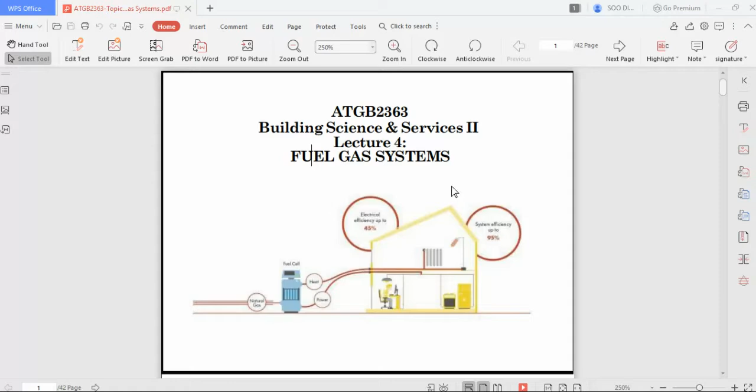Okay, so this is topic 4 for fuel gas system. It will be part 1. Part 1 will only cover the gas industry and the fuel gases. Okay, you have a reference. This subject is based on these two book references, which are Building Service Handbook by Hall, F. and Greeno, and then Environmental Science in Building by McMullan. So these are quite recent books, 2015 and 2018.

Okay, so our CLO: by the end of this course, we should be able to apply all these building services, the principles of design, and also any basic calculation. Okay, in this topic, we are covering fuel gases. So in Malaysia, we have 3 times more gas reserve than oil, and gas is actually more efficient in generating electricity than oil. So this is all information available.

We are actually the 15th largest gas reserve and 27th largest crude oil reserve in the world. So basically, these are all good for the economy lah. We have very good natural resources as compared to other countries. So additional information of our gas reserve and then how much is available.

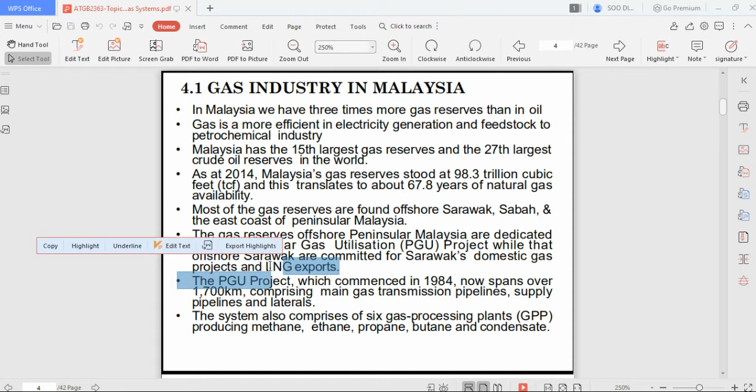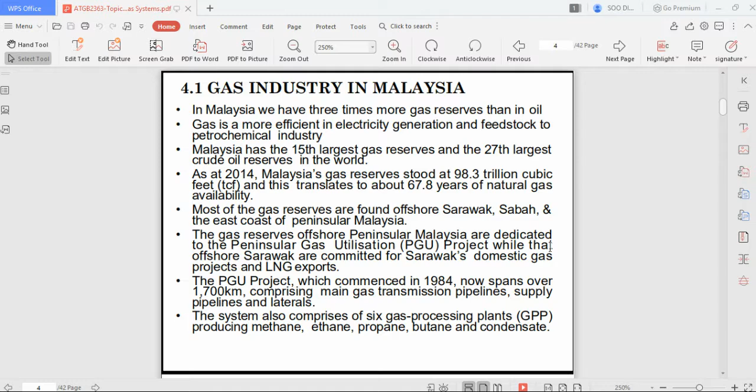Then the PGU project commenced in 1984, spanned over 1,700 kilometers, and we have our main gas transmission pipeline, supply pipeline, and laterals. The system is composed of 6 gas processing plants, producing methane, ethane, propane, butane, and condensate. So this is our Malaysia. We have a lot of pipelines for all our natural gases.

And then there are rules and regulations for our gas supply system: Gas Supply Act 1993 and Gas Supply Regulation 1997. This is to ensure that the supply and distribution of the pipeline to consumers are controlled and regulated. So for any sort of plant, there will be acts and regulations associated with, let's say, this gas supply system or electricity generating system. All these are in place to ensure that everything is built according to spec and controlled, so that from supplier to consumer, all of these are built safely.

So you do not want to have your electric generation building or your gas supply system in a very low quality built environment. If they are built very poorly, maybe in some cases it's not so dangerous, but it must not be allowed lah for the contractor to build poorly or for the designer to design the system poorly. In the case of a nuclear reactor, it's even more stringent lah. That's why there are all these rules and regulations for them to follow.

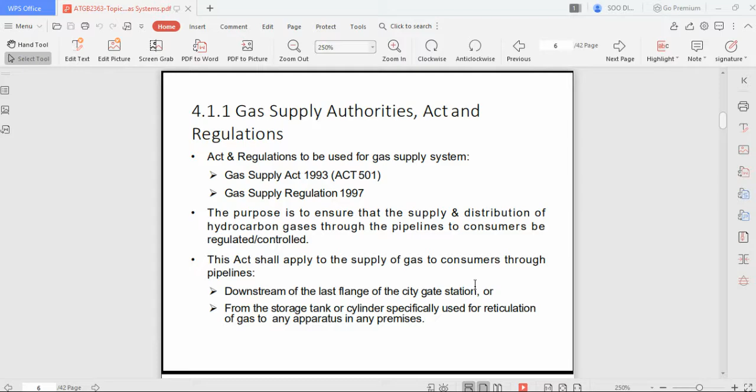Okay, for the gas supply system, the Act shall apply to the supply of gas to consumers through pipeline, downstream of the last flange of the city gate station, or from storage tanks and cylinders specifically used for reticulation of gas to any apparatus in any premises. So the Act applies from where the gas is located, very far away, to the consumer.

Okay, so next is fuel gas. Fuel gases are flammable gases customarily used for burning with air to produce heat, either for power or light. The widely used ones are natural gas and liquefied petroleum gas. NG stands for natural gas and LPG stands for liquefied petroleum gas. So although NG and LPG perform similar tasks, they have different chemical properties.

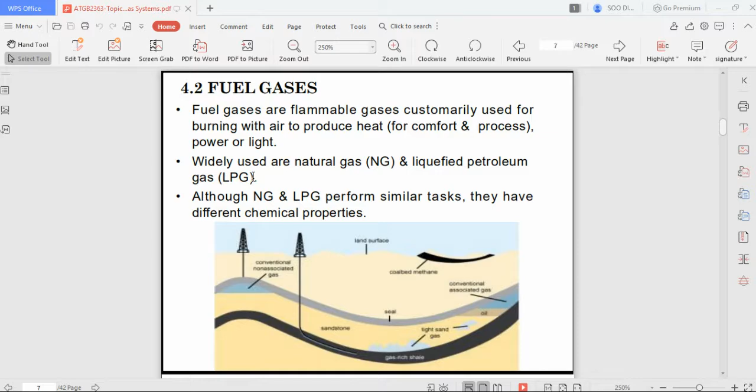So what you find in your tangki gas in Malaysia can either be natural gas or liquefied petroleum gas. Both of them are used for the same function. This NG and LPG are not what you use in your car. In your car, you are actually using petroleum, so it's not a gas. As I said before, NG and LPG are what you will find in your gas tanki which you use for cooking lah. So they are basically the same, but they have different chemical properties.

Okay, so natural gas is odorless and colorless. Natural gas is basically methane.

So they are combustible and when burned off, give a great deal of energy and offer higher fuel efficiency compared to petroleum, which is the LPG lah. Unlike other fossil fuels, they actually burn clean and emit lower levels of potentially harmful byproducts into the air.

So all the fuel that we use, if you are to use it up, is actually releasing byproducts. And here it says that natural gas is actually less harmful to the environment. Although they are releasing byproducts, they are cleaner, which means they burn more efficiently. Most of the product is being burned off instead of being released back to the atmosphere. So this is what it means lah, by it being a better source of fuel and being cleaner as opposed to our petroleum.

Okay, so they are lighter than air, which means they are easily dispersible, and they are a more cost-efficient fuel if you are to use it as compared to other petrol-based energy sources. So in the end, natural gas is vital and is one of the cleanest, safest, and most useful of all energy sources.

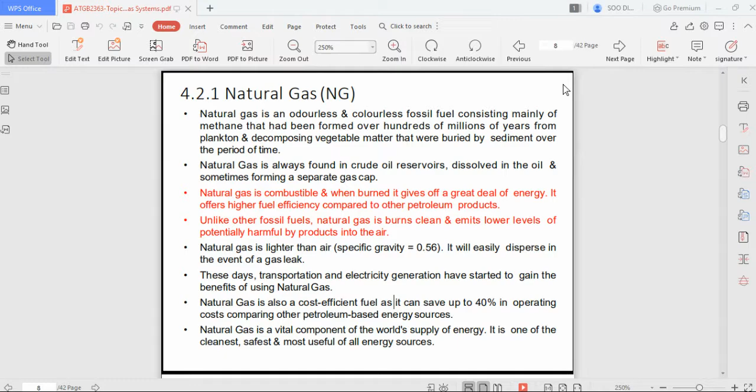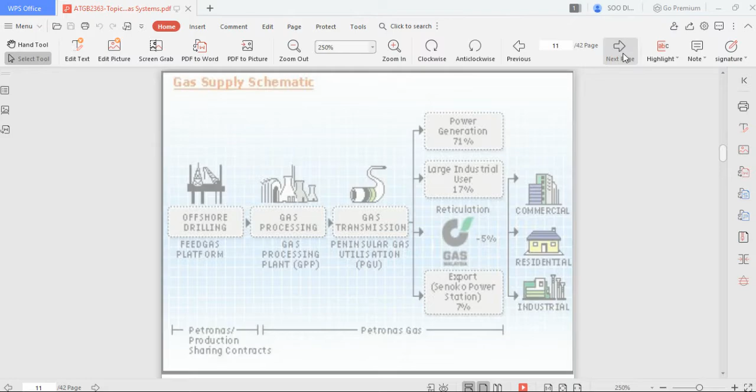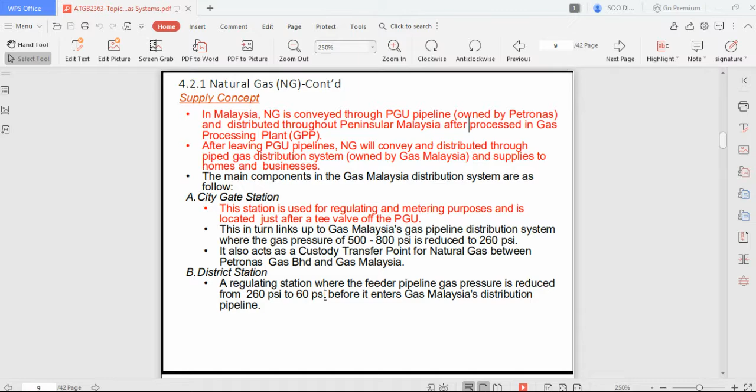For the first part, A, the city gate station, the station is used for regulating and metering purposes and is located just after a tee valve off the PGU. This follows the electrical generation system, where it is harvested from the source and transported at a very high pressure, and as it moves past different systems, the gas pressure is reduced, and at the end it will be at a very low pressure lah, at the distribution line. So there are different stations, and as it passes each station, the pressure is reduced.

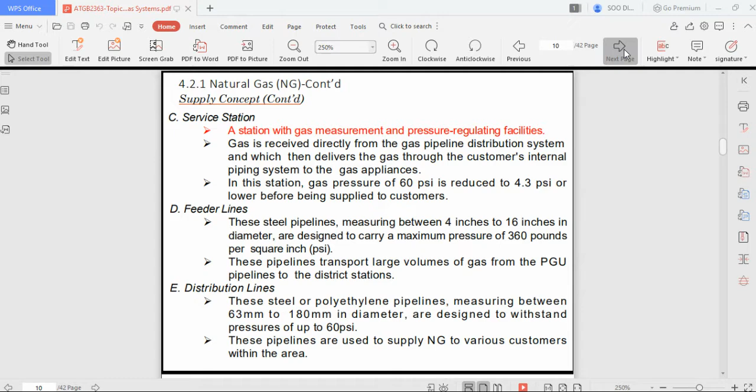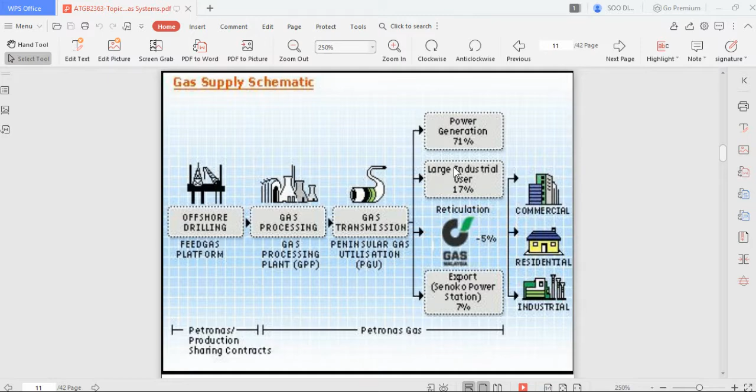So this is the gas supply schematic. Gas is obtained from offshore drilling, and then processed to be separated properly into natural gas or liquid petroleum gas, and then transmitted. This gas transmission spans thousands of kilometers, and ends up at another station for either commercial, residential, or industrial purposes. So this is another schematic on how natural gas is distributed.

And this is info on liquid petroleum gas. So natural gas, NG, and LPG are the same in terms of their usage. But what makes them different is their chemical composition. NG is methane, but LPG is butane and propane. These gases are stored in liquid form, which means they are stored under pressure. To use them, the pressure is released and the NG and LPG vaporize into gas. One of the differences between LPG and natural gas is that LPG is heavier than air.

Oh, okay. Okay, so I'll slow down a bit.

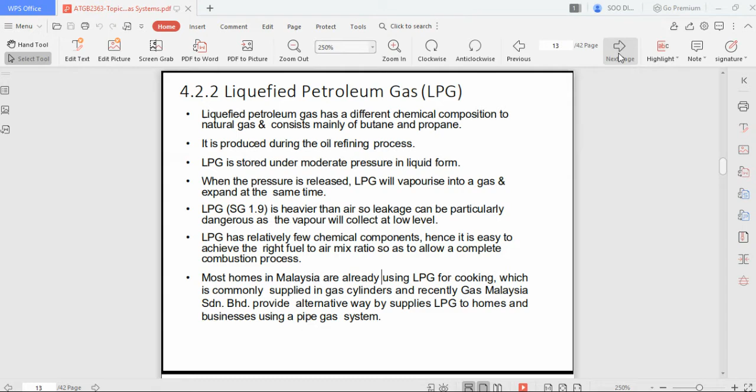Okay, so this is our gas tangki. Particularly, we use this, but we are slowly changing to copy what the US is doing, which is to install the gas pipeline to every home or condo.

So we have the supply at the tips of our hand, like electricity. But in the case where the gas supply line is not available yet, this supply can actually be installed in the condo. The supply can be isolated within the compound, meaning we have a very big tank, and it's being supplied through a pipe system to the condo. But I see this is rare, so mostly we'll still be using this.

But this is one of the ways that NG or LPG can be supplied for residential usage. So there's two methods to supply if you are to isolate an area within a compound to install this container. One is the bulk tank system and another is the manifold system. Basically they are about the same.

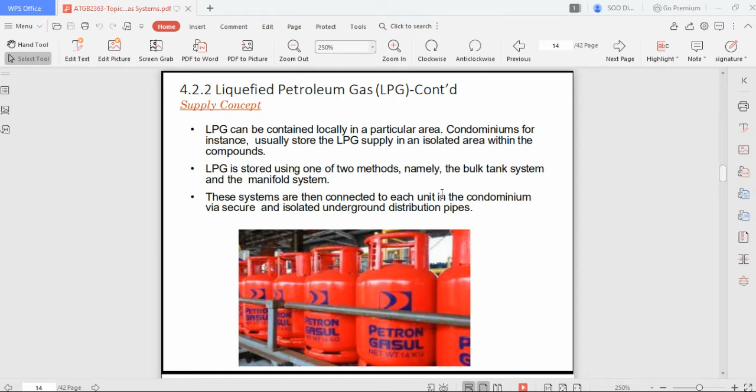For the bulk tank system, it's a very big container which contains the gases. The manifold system is just simple larger-than-this-size tanks connected to each other to supply to the condo or the particular area. These two methods will be shown in a later slide how they will look like, so all of this information will be connected seamlessly.

Okay, so this is a flowchart of how the LPG is being distributed.

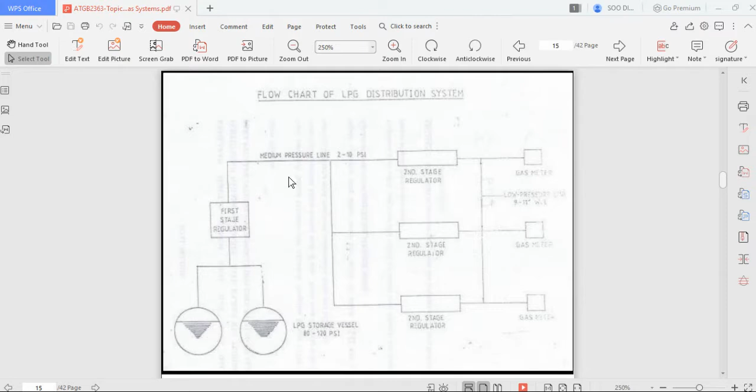So mostly fuel gas burns clean and does not emit ash or soot upon combustion. Soot is some sort of carbon or ash, which is black in color. So fuel gas actually burns clean, but all these systems are made in place in case you have other things burning.

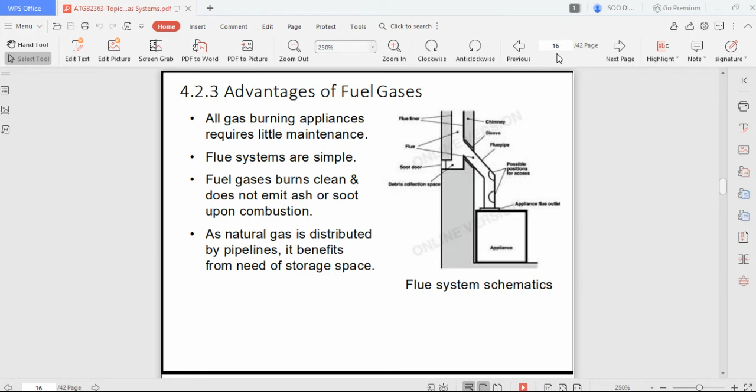Okay, so this is the last part. To summarize, NG and LPG are basically what you'll find in your gas tangki. So there's a comparison, there's a difference between natural gas and LPG. For NG, they actually produce about 9.7% of flue, and LPG produces about 12% of flue. So based on usage, NG is actually more environmentally friendly.

And the difference between NG and LPG is that NG is more difficult to ignite if leaked. This is due to their chemical composition, that's why they are more difficult to ignite and burn off. The flame temperature is about the same, but how they are supplied is a bit different.

LPG requires storage space and constant refill, so you do not supply LPG through the pipeline. Natural gas can be easily supplied through the pipeline. So that's about it for today.

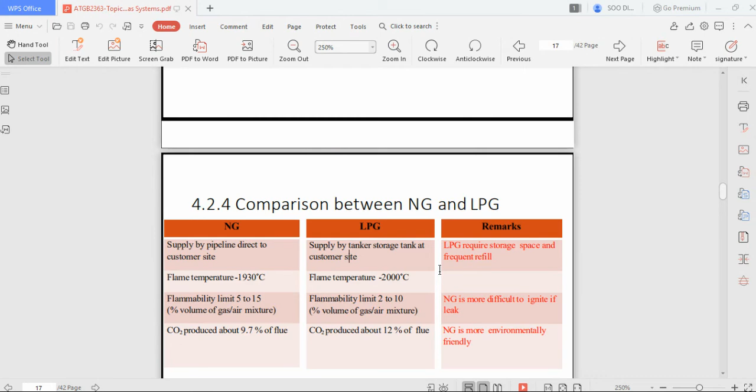One thing you need to bear in mind, NG and LPG - this is the source of fuel we use in our tangki minyak, the tong tangki, which we use for cooking. So these two are not used in your car. They are in gas form, which is compressed to liquid.

In the case of LPG, it's compressed to liquid into our gas tangki, or in the case of natural gas, it's supplied at high pressure, and then slowly reduced to our consumer level. So all of them are pressurized under moderate pressure.

But there's a difference between NG and LPG, which is LPG can only be supplied through tanker storage tank at the customer site. What we find in our house, the tong gas, is LPG. NG can also be supplied in tong gas, but do bear in mind that LPG cannot be supplied by direct pipeline. So this is the main difference between LPG and NG - LPG cannot be supplied through pipeline.

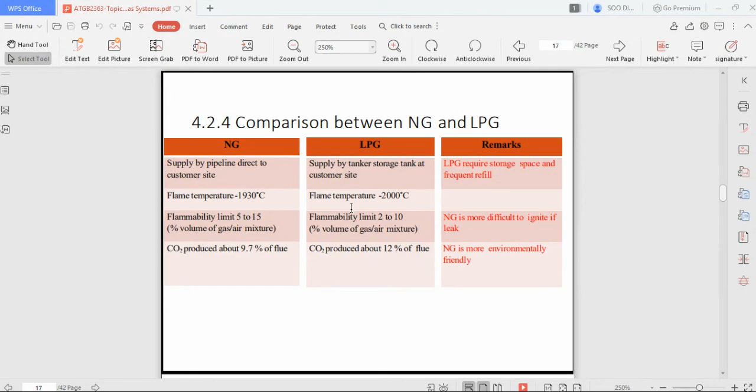And this is for you guys to know, which is not written very clearly here. But the usage of NG and LPG is the same. So for this, we will continue in our next session.